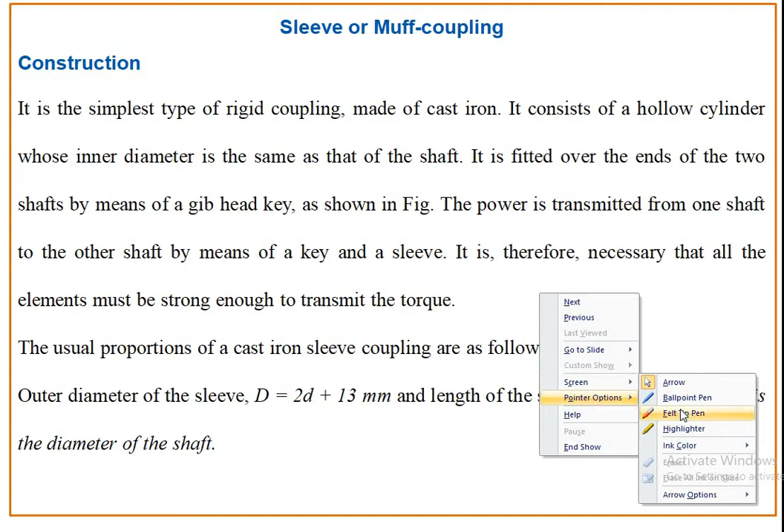As we know that the function of coupling is to connect the two shafts to carry the power or to transmit the power for the longer distances. So this can be accomplished by using different types of the couplings. Out of that we are starting the sleeve or muff coupling. Now muff coupling is the simplest type of the rigid coupling. We have seen the basic two types of the couplings, that is the rigid coupling and flexible couplings.

So muff coupling falls into the category of the rigid coupling, where there is no misalignment between the two shafts those we are going to connect. So when there is no misalignment between two shafts that we are going to connect, then we are preferring the rigid couplings. Now this coupling is made up of a cast iron. It consists of a hollow cylinder whose inner diameter is same as that of the shaft. So the construction of muff coupling is like a hollow cylinder.

On the shaft that we are going to connect with each other, on that shaft this muff or this sleeve is placed, whose inner diameter is same as that of the shaft. Now it is fitted over the two ends of the shaft by means of the gib head key. Means we are using a gib head key for attachment of two couplings. Already we have seen the function of key, why we are using the keys.

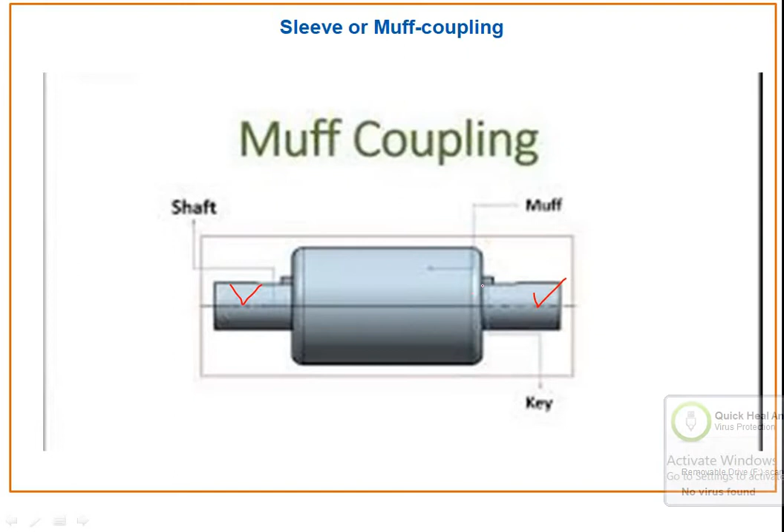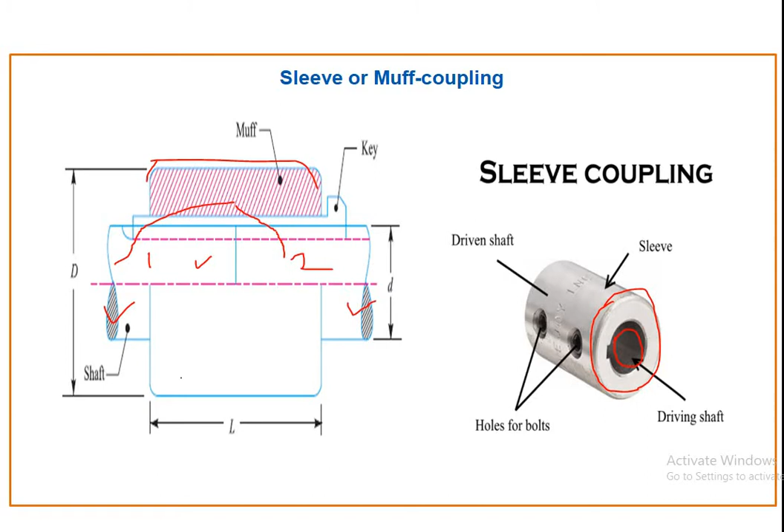Now the standard proportions of the muff coupling are as follows. The outer diameter of the sleeve, means this outer diameter of the muff, is D, which is given as 2 times d plus 13 mm, where d is the diameter of shaft. Length of the sleeve is given as 3.5 times d, where d is the diameter of the shaft. Now these are the standard dimensions.

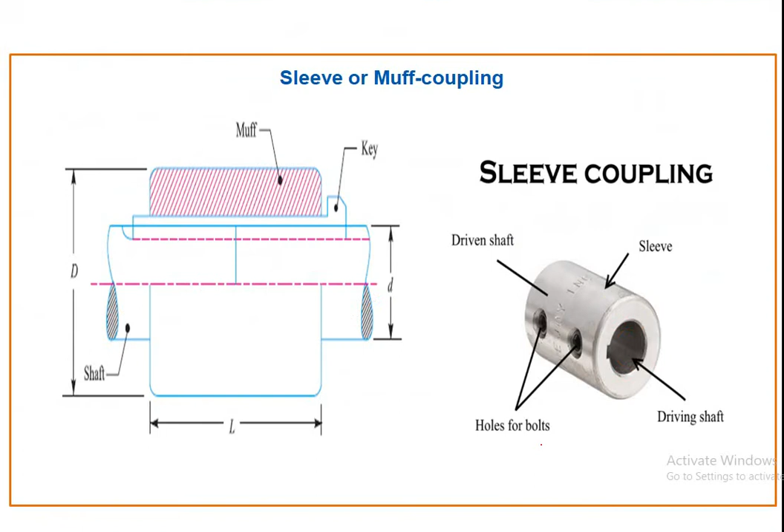We can directly use these relationships to determine the value of outer diameter of the sleeve and length of the sleeve. The design of sleeve coupling is nothing but determining the dimensions of the sleeve coupling, that is the outer diameter of the sleeve, diameter of shaft and length of the muff or length of the sleeve. Now let's start with the design procedure of a muff coupling. In designing a sleeve or muff coupling, the following procedure may be adopted.

First thing to design in the muff coupling is the design of sleeve, which is also known as the design of muff. The sleeve is designed by considering it is a hollow shaft, because its construction is like a hollow shaft. Now this upper portion is the sleeve, and it will be designed by considering hollow shaft.

It is having 2 diameters. This upper diameter is capital D and the smaller diameter is the diameter of shaft, small d. So capital D is the outer diameter of the sleeve, and small d is the inner diameter of the sleeve. Now T is the torque to be transmitted by the coupling.

Now we have to design the sleeve by considering permissible shear stress for the material of the sleeve, which is cast iron. We have to design the sleeve by considering the torsional shear stress. As it will be considered as the hollow cylinder and the shaft is transmitting a torque, we have to design the coupling or sleeve by considering permissible shear stress.

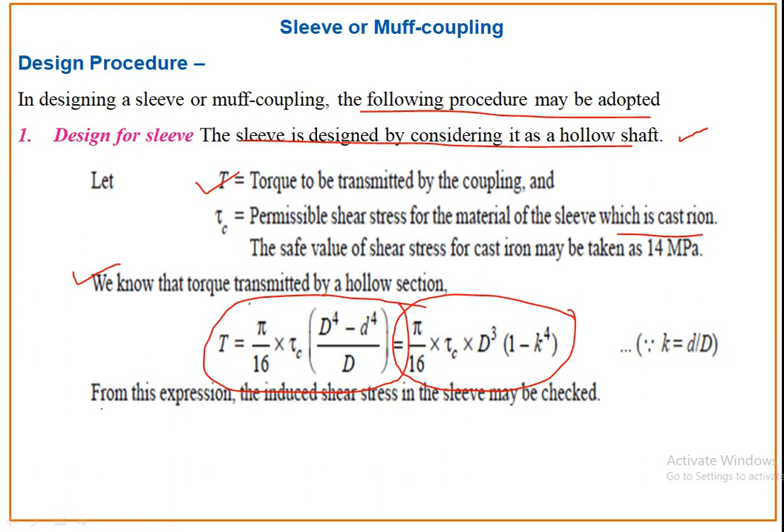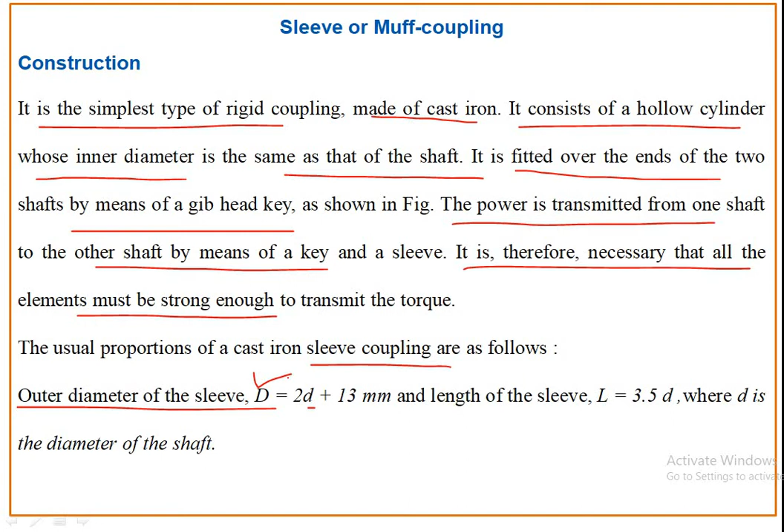Now from this equation we can determine the induced shear stress in the sleeve. We know the permissible value. If this value, this tau c by calculation, comes less than this permissible value, then the design is safe, because we are taking capital D is equal to, we are using these two relationships. We are actually not designing this. D is equal to 2d plus 13 and L is equal to 3.5 d.

So by considering this relationship, if we are determining capital D and small d, then we have to check the induced shear stress in the muff coupling. If this calculated value of induced shear stress comes less than this permissible value, then the design is safe. If this value comes more than this value, then the design is not safe. In that case again we have to increase the diameter of sleeve.

So the first component of muff coupling is the sleeve. This is the first component that we have to design. Second component is the design of key, because there are only two components: one is the muff and another is the key. So in designing of sleeve or muff coupling, the following procedure may be adopted. Design of key: the key for the coupling is designed by considering shearing and crushing of the key.

Already we have seen in the design of sunk key, we have formulated the equation for the sunk key by considering shear stress and by considering crushing stress. The width and thickness of the coupling key is obtained from the proportions. Already we have seen the proportions for that. The length of the coupling key is at least equal to the length of the sleeve. Now length of the sleeve is given as 3.5 into d, so the length of the key is taken as at least equal to the length of the sleeve, that is 3.5 into d.

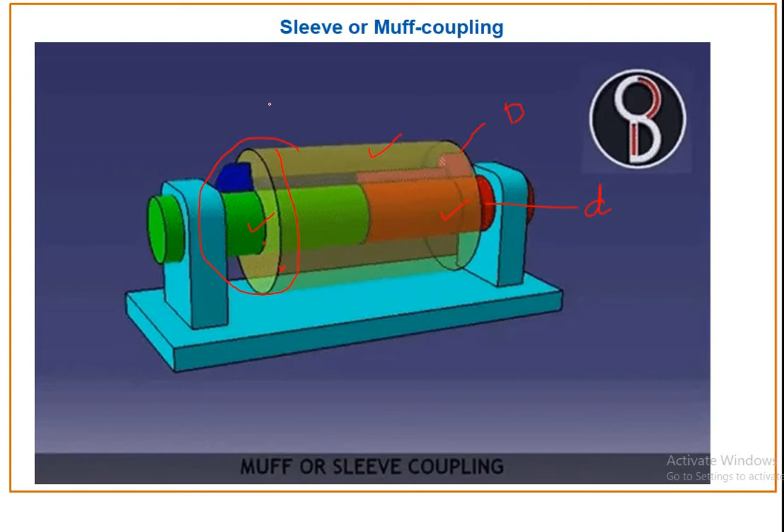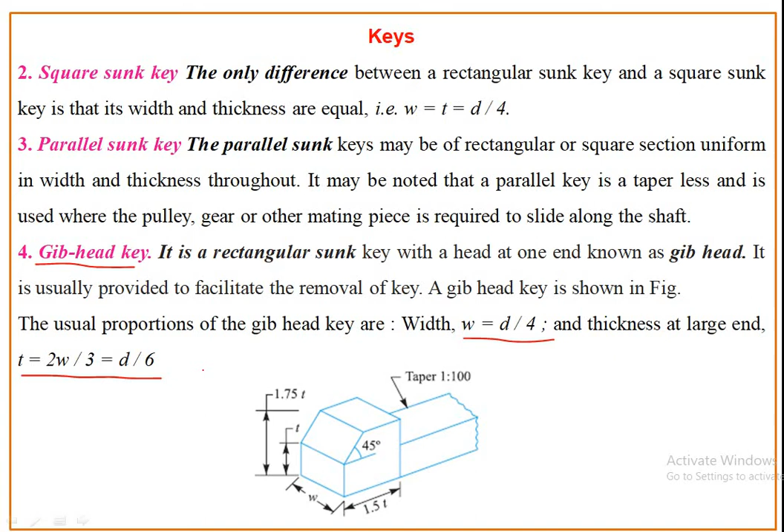As we are using gib head key, we can take the width and thickness by considering the standard equations of gib head key. Already we have seen the key portion. This is the gib head key. We are using the gib head key in the muff coupling. So this is the width of gib head key, d by 4, and thickness is equal to small d by 6. So we have to use these two standard equations of width and thickness for gib head key.

And then, using the torque transmitted after fixing the length of key, this is the length of key in each shaft, the induced shearing and crushing stresses may be checked. Here we have checked the shearing stress induced in sleeve or muff. Here we have to check the induced shearing and crushing stress in the key.

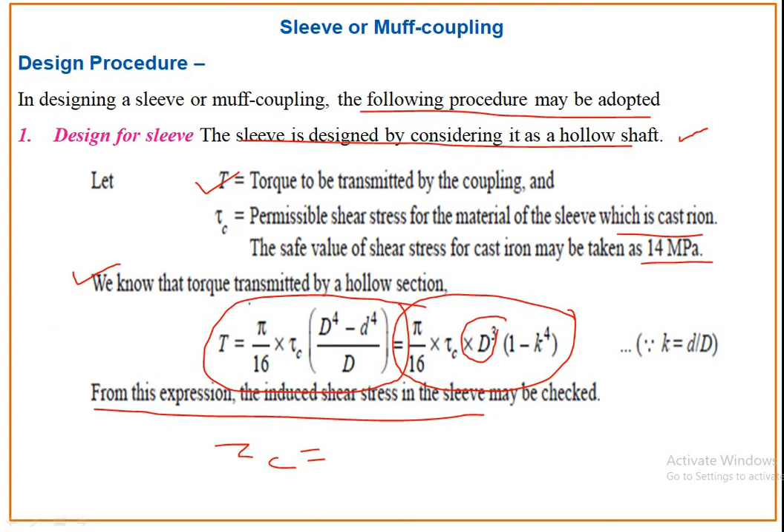Now from this equation we get the T. T is equal to torque transmitted by the coupling. By using that T, L is 3.5 times d, width is small d by 4, d is the diameter of shaft, and the value of tau is given. Now in this case, this tau is the tau for key. Here we have used a tau for muff or sleeve. Here we have to use the tau for key, means permissible shear stress for key. From this value we can determine the induced shearing stress for key, tau key.

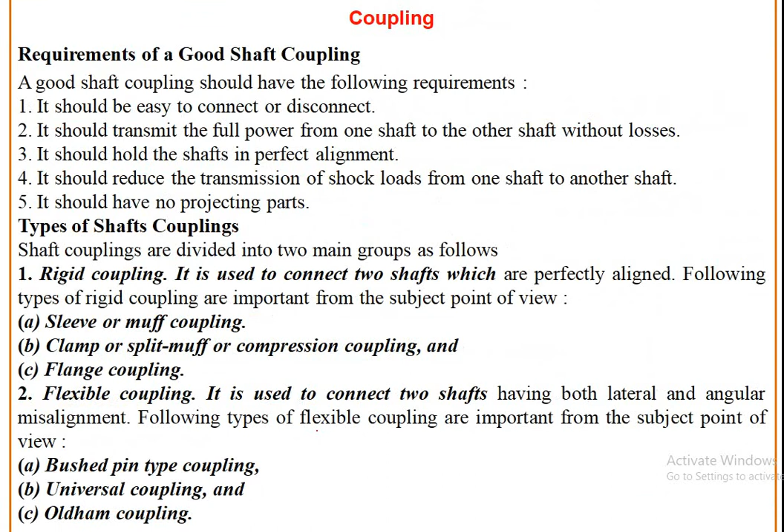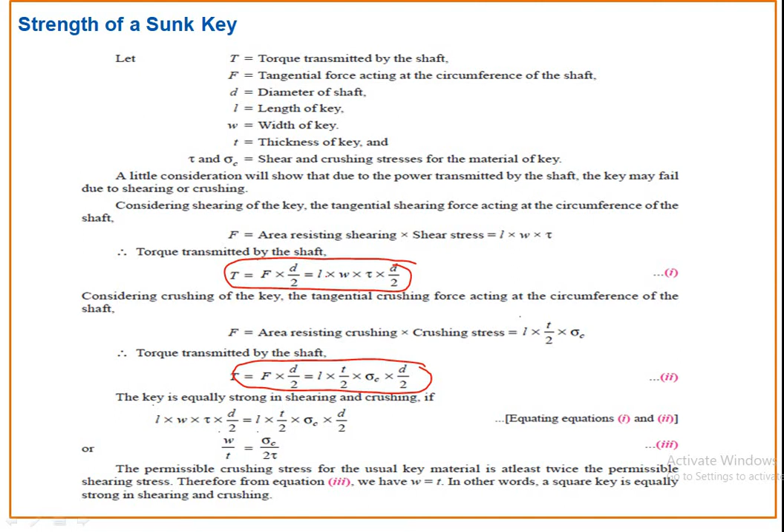So we have to check these two values, means induced shear stress in key and induced crushing stress in key. These two equations already we have derived in the portion of key. This is the torque transmitted by considering crushing of the key, and this is the torque transmitted by considering shearing of the key. We have used the same equations in this portion, that is torque transmitted by key considering shearing and torque transmitted by key considering crushing. So this is the design of muff coupling.

Now design of muff coupling is nothing but we have to calculate the induced shear stress in muff and induced shear stress in keys, because these are the two major elements. Already we know the diameter of shaft, and we know the torque transmitted by the shaft. So by using this basic torque transmitted, we have to design this sleeve.